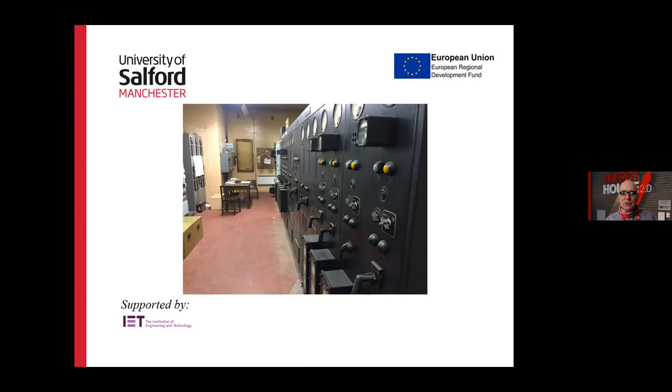This is just a little diversion, a little tangent here. I had to go around all of these substations, so I got to see more inside them than most people would. I started noticing that because they're humidity controlled, things last for a long time, and these large substations all had a table and two chairs. What I came across was this amazing collection of chairs going back from the 1950s all the way through to the 1970s. Because of the temperature and humidity controlled environment, they were in really good condition. I even had a little Twitter page called Chairs in Substations—I mean, these are pretty worth a fortune on eBay. But anyway, I digress.

So, the electricity network. Once upon a time, our electricity network was based on coal, and we had very few, very large coal-powered power stations. They would be running almost 24/7, often full on, running at full steam, and that would then go down the electricity network to the electricity meter in your house.

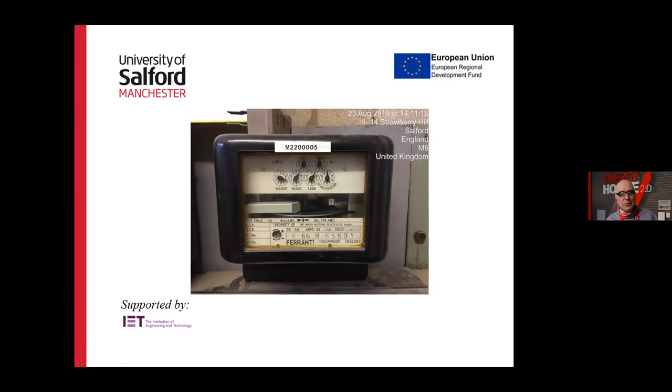This is a classic one—I used to go around all the substations, and this was one of my favorite ones here: a very old dial electricity meter. If you look on there, you can see 'property of the Northwestern Electricity Board,' made by Ferranti in Hollinwood—I think the Manchester Evening News is now printed in there. So this is a locally produced product, and the serial number F66M—the 66 is, I believe, the year of manufacture. That was the last time England won the World Cup.

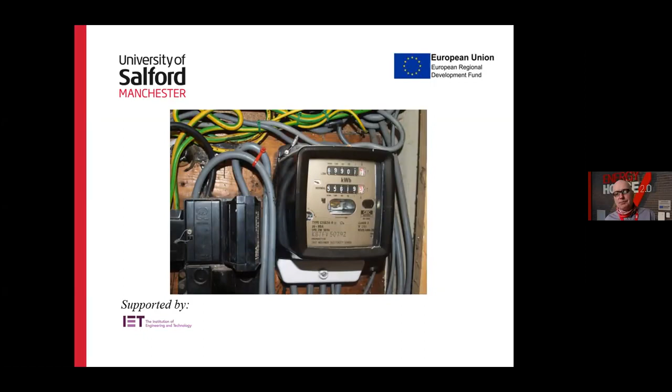So that was the standard meter, but because of the large coal-fired power stations running all the time, you did get high demand during the day and lower demand but still high generation during the evening and night time. So you'd have meters like this, with two readings: the top one for the nighttime tariff, economy 7 or whatever you'd like to call it, and the bottom one for peak demand. But whether it's the meter you've seen there or the previous one, it all came down to, at the end of the day, someone had to come round and read your meter. But the world has changed.

But then things changed again. Gas moved on to renewables. So what you're seeing is that these single large power stations gave way to generation becoming more decentralized and diverse, from wind, solar, and biomass to some extent - and in the home as well. This is what I'm really trying to concentrate on: what happened in the home is that we got the smart meter.

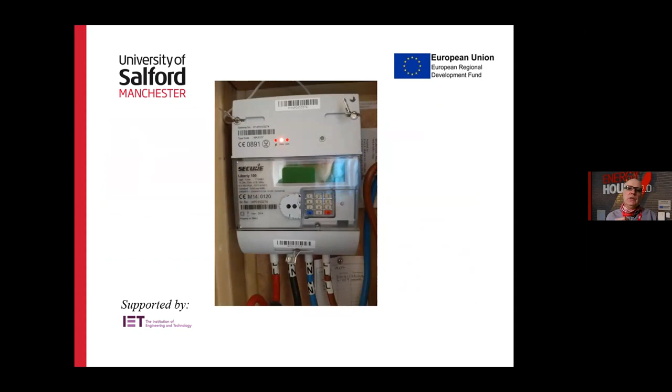So if we look in more depth through the keyhole at the anatomy of the smart meter, see what's going on here. This is the smart meter. Like I said, the old display was you had to come out and read it - it was a visual display. You still have that on the new smart meter, so you've got the display there. You have to press, I think it's A9, to bring up the consumption data on there.

Also down at the bottom, you see that's the proper meter - it's been replaced there, so that's just giving you the details of when the meter was replaced. But you've also got something there - those double dots, that's an optical port, so you can put something in there and draw data out of that locally as well. That's a big advance from the previous meters.

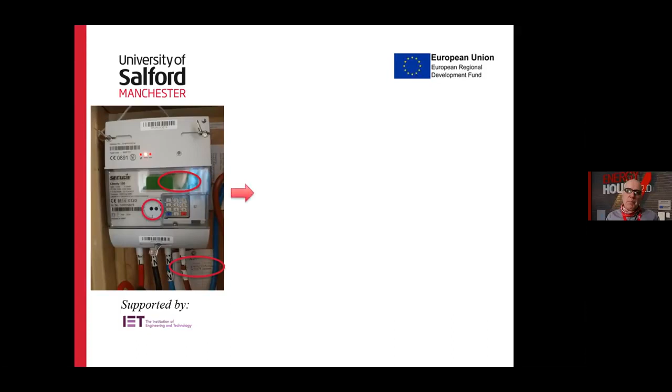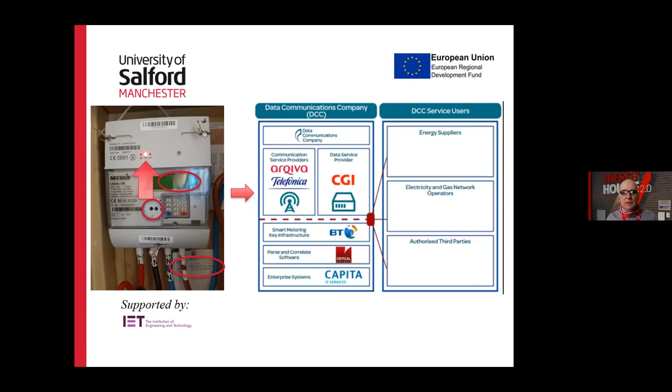But what's even more interesting is that you don't have to have someone come out and read this - it will read itself. You get a transmission of data here through the secure data network run by the Data Communications Company, and that data will then go out to the energy suppliers, electricity and gas operators, and authorized third parties. That arrow pointing up, with the light on, shows information going outwards to the wide area network, or the WAN.

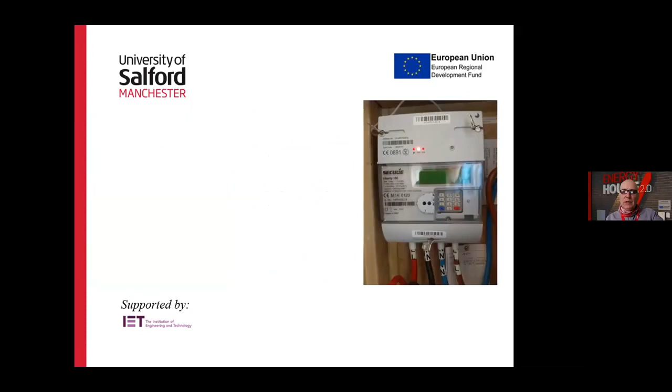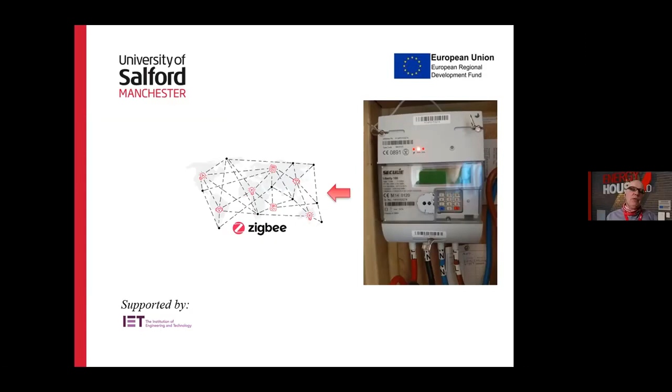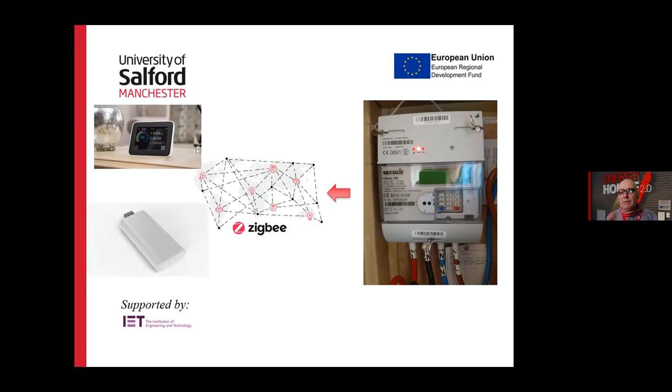However, it does something else as well - it transmits in the other direction too. There's also a Zigbee network attached to the smart meter, transmitting through the house, most commonly connected to your in-home display, but could also be connected to that other device - a consumer access device. So things are going both ways. There's a little button there where that arrow points, and you can see it says HAN on there - you probably won't be able to see that, but that's what it says. This meter is a SMETS 1 meter, and everyone's now moved on to SMETS 2 meters.

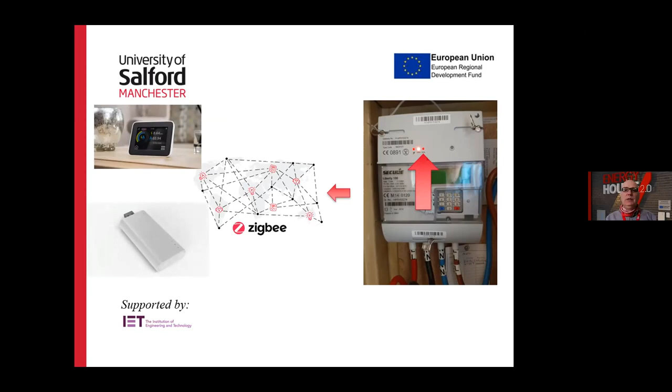So yes, the network inside your home is called the Home Area Network, or the HAN.

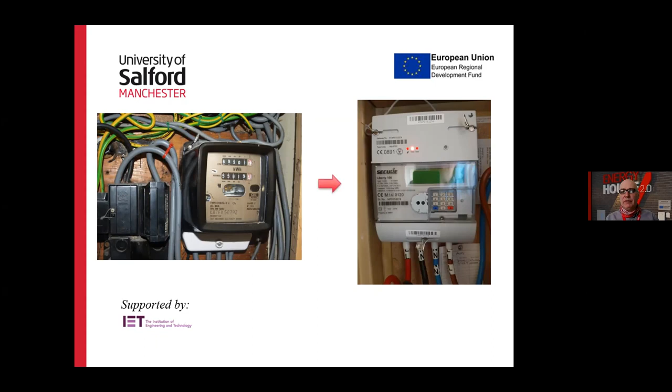The thing is that with renewables, compared to other sorts of generation, wind blows variably, and if you've got solar, the sun's out sometimes and not other times, which means there's more variability. So how do you handle this in the home? Well, on the left you see that old meter, which really only handled the nighttime and daytime tariffs. Now the smart meter can handle a variety of tariffs - it's a bit smarter, a bit more flexible, and it can handle these things you'll learn about, the time of use tariffs.

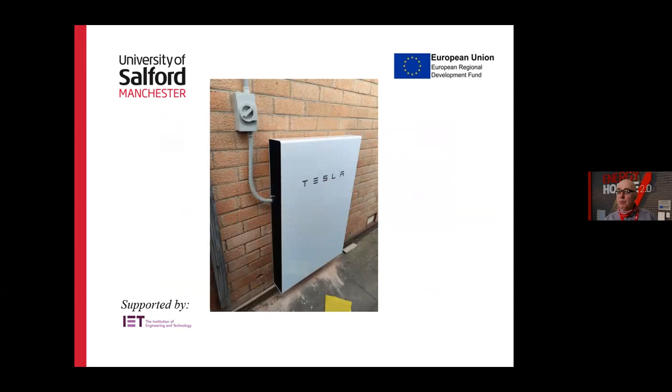Additionally, look at the home now - your home may have PV panels on it, your home may have a battery, and your home will soon or probably have a charging point attached to it, which will be the largest demand at any single time that you probably have from your domestic supply. You can also begin to do bi-directional charging, so you could use that car like a battery to either run your home or run back into the grid again.

So what we've seen now is that this is the way the network's gone: decentralized generation, variable generation, better data transfer, smart meters. We have a home area network, infinitely variable tariffs, and two-way energy flows. So very briefly, the old model: coal, electricity, through that meter into your home.

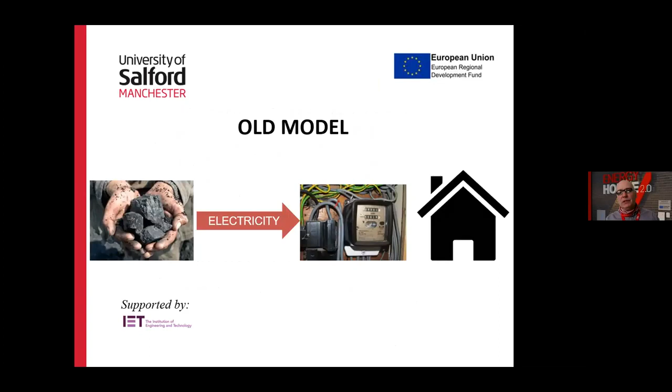The new model that we're seeing is a lot more complex. You've got renewables generating electricity, but the home itself could also have solar on the roof, putting electricity into the home and maybe back out again. Batteries going in and out, cars could be going in and out. And the interface for that is the smart meter.

So what you're seeing is that electricity will be going both ways, not just in one direction. And also data is going both ways as well. So this is a big step with regard to what we had, not only 10, 15 years ago.

So that's a simple introduction to how the energy network has changed from generator to consumer. It introduces the smart meter to the home and its potential, and there is a lot of potential for the smart meter, and it sets the scene for the following presenters. So I hope that was a nice, simple introduction for you.

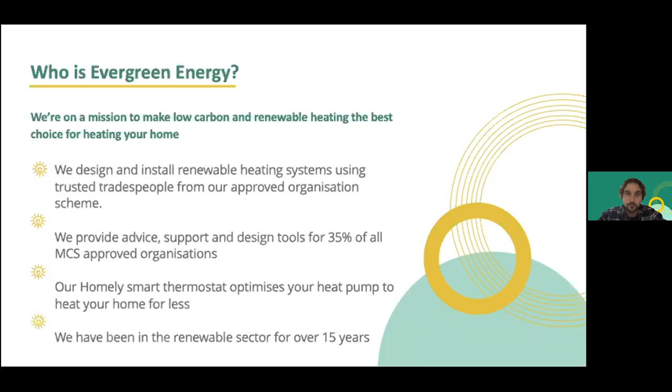I'll just do a quick intro in terms of why we're here and why we're talking about heat pumps. Manchester, for example, is aiming for net zero by 2038. To achieve this ambition, we'll need to see a significant change in the way we heat our homes, moving predominantly from gas boilers to a combination of electric heating, including heat pumps, district networks, and potentially hydrogen. In this workshop, I'm going to talk about the problems associated with electrification of heating and how a combination of smart tech and tariffs can help us overcome these.

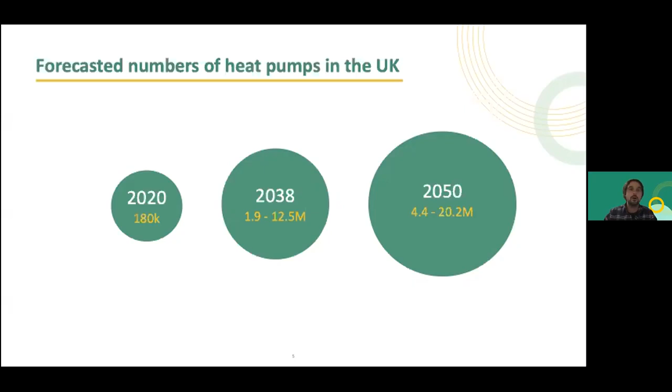A few numbers to get us going. At the moment - this might be slightly out of date - there were around 180,000 heat pumps installed in the UK in 2020, with that number growing rapidly in the next years towards 2050, 2038. The numbers in these slides have been taken from the future energy scenarios - National Grid provide potential scenarios of how we're going to achieve our energy ambitions.

In line with the heat pump changes, there's also a change in the way we generate our power, and we're looking to see a huge increase in the amount of power generated from renewable sources such as solar and wind, doubling in almost all National Grid scenarios by 2038.

Even though heat pumps are a great way of reducing carbon emissions - nearly 2 tons of CO2 can actually be saved per heat pump per household per year - there are some limitations in what our current electricity system infrastructure can handle.

If we were to assume heat pump change would happen tomorrow, and say that 12.5 million heat pumps were plugged into homes at similar times of day - just because the majority of people have similar profiles where they go to work and come back home, or at least we used to - that would cause concerns in terms of how the network is managed, and basically the power we'd need to push through the networks would make it really difficult.

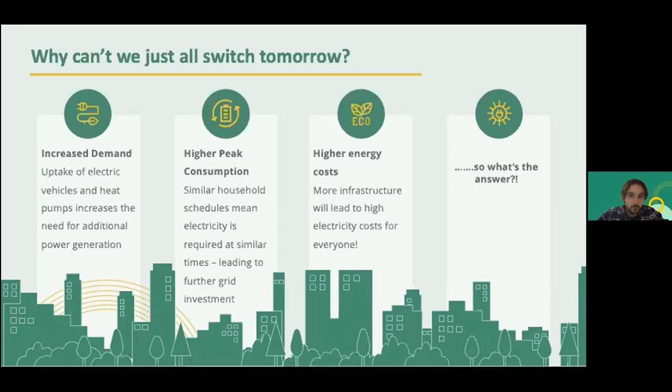We'd also need to consider that heat pumps are not the only load we're trying to electrify - we're seeing an increase in electric vehicle uptake too. As you add on all these different loads going onto the electric networks, we can see that without smart management of them, we'd see sky-high peak demands, requiring us to build more power plants, lay more cables, and pay potentially more for our electricity in the future.

Alternative to building additional infrastructure is, we believe, smart control of these devices. As an example, by using smart heat pump scheduling and smart vehicle charging, we can smooth some of these demands. So even though we all want our houses to be warm in the morning when we get up around 7 till 8 o'clock, and when we get back home, 6 till 10 o'clock in the evening, there is a way how these loads can be managed throughout the day and shifted around.

So you can start using houses, for example, as batteries. You can overheat it slightly during off-peak periods where electricity prices are slightly lower, and coast through the more expensive periods, smoothing out that demand curve throughout the day. This in turn reduces customer bills and the need for network reinforcement, as well as increasing the use of renewable energy, as some of those loads can be shifted to periods of high power production from renewable sources.

Quick explanation of how the electricity, how the actual domestic bill is created. I thought this was quite interesting: the wholesale price of electricity, the cost that an energy provider or power plant would sell that power to the electricity supplier for, is only a fraction of the actual electricity bill that we're paying. At the moment, the wholesale cost contributes to around 32% of the whole electricity bill. The other major components include network costs, operational costs, and some other levies the electricity supplier needs to add on to the bill.

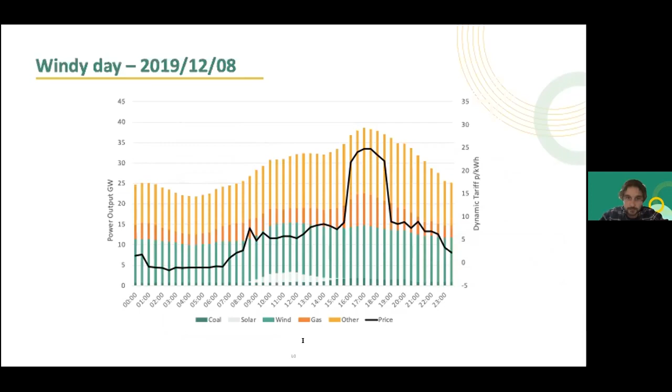There are, of course, other days when the prices are not as favorable and you don't get paid to use electricity. In the previous example, Agile customers, and Homely customers, had their heat pumps automatically turning on during the night just because they saw that opportunity to take advantage of those low cost periods. But on other days that's not as favorable, although there are still these pockets of electricity that are cheaper than the average throughout the day.

In this particular day, we can see that the wind production was much lower than the previous example. What Homely would do is try to pick out these cheaper pockets of electricity and dump as much heat as it can during those periods to coast through the more expensive parts of the day.

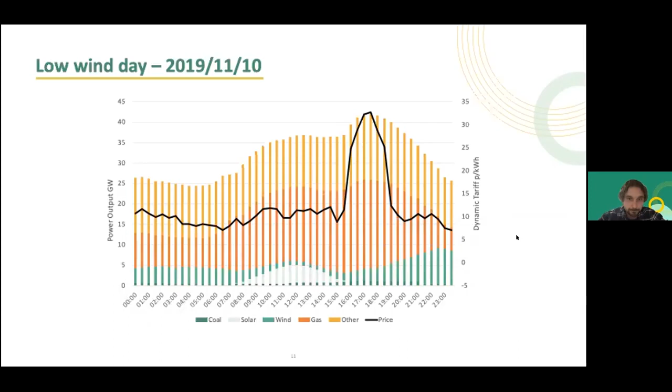That's a quick introduction into how it all comes together with the dynamic tariffs. Is there any questions at this point that I could clarify before I move on to the next part?

There's a question coming from Julian, which says, would it be sensible to shift the environmental and social obligation costs to gas as a fossil fuel?

From my personal opinion, I would like to see electricity prices being lower, because that is one of the routes we can take to decarbonize, through electrification of everything. I'm not sure whether I'd say those levies should be shifted onto gas. I would like to see the difference between the electricity price and gas change in that regard.

At the moment, the fixed cost of electricity, last time we compared, was around 12 pence per kilowatt hour, and around 3.5 pence for gas, which makes it quite difficult for heat pumps to compete, even though they're achieving 3.5-4 units of heat for every unit of electricity consumed. It's still a difficult position to be in. Sorry, I don't think I've fully answered the question, but I would like to see more of a change in the way gas is charged versus electricity.

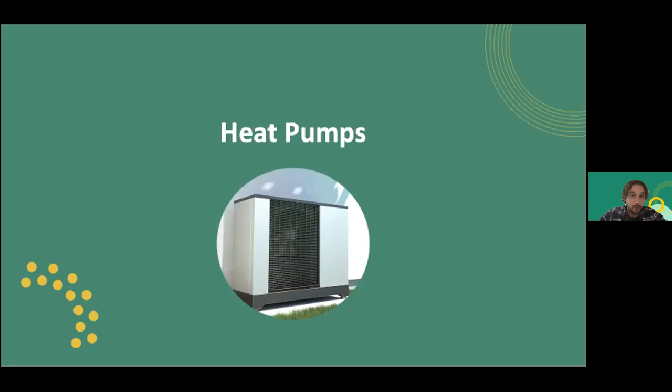So this bit is about what heat pumps are. In a nutshell, heat pumps are a very efficient way of heating the home through heat extracted from the outside air with an air source heat pump, or ground with a ground source heat pump, and delivered to your radiators and hot water cylinder with the help of electricity.

As some of this energy is actually extracted from external sources, heat pumps are able to deliver around 4 units of heat throughout the year for every unit of electricity that they consume, which means that 3 units of that heat is kind of free.

In addition to reducing the overall energy used for heating, they can also reduce customer bills further when combined with the variable tariffs we've been talking about today, such as Agile Octopus.

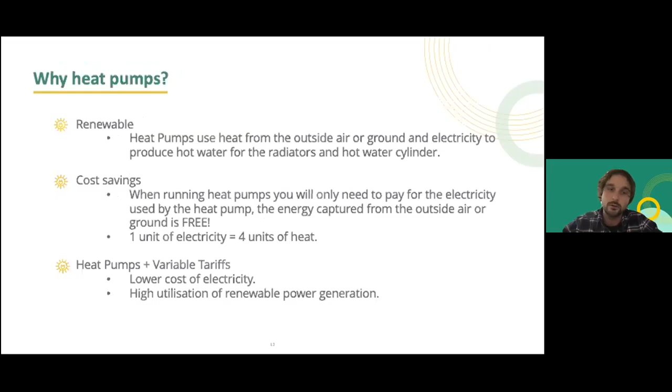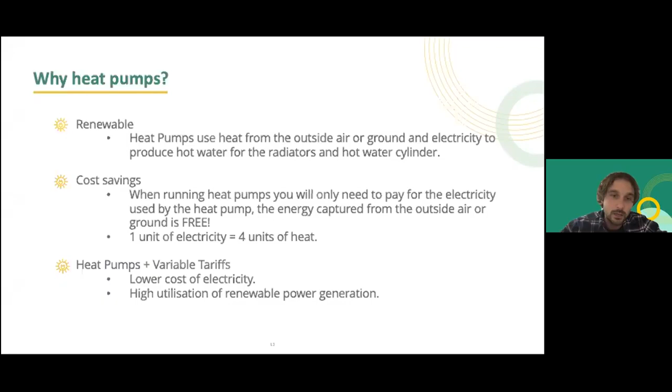The Homely thermostat is kind of the brains in the background to make sure that the customer doesn't need to run around and turn his heat pump on and off every time he sees a price dip. In the background, this is where Homely would take control, and it would try to slightly overheat your house during the cheaper times, and coast through the more expensive periods.

Just in terms of how the heat pump works, and I'm not going to go into detail again here, but on the slide at the moment you can see the reverse refrigeration cycle. It has 4 main components: the evaporator, compressor, condenser, and the expansion valve.

The way the heat pump works is that the evaporator extracts heat from the collector and transfers it into liquid contained within the evaporator called refrigerant. This would be your outdoor unit, for example, for an air source heat pump where there's a fan running. The refrigerant starts to boil once it's heated up by the energy from the collector.

The gas generated then moves through the compressor, which increases the pressure of the gas, resulting in an increase in temperature. The high temperature gas then travels to the condenser, which transfers the heat to the heating system. So on this side, you would have your hot water tank and radiators.

The final step in the process is the expansion valve, which removes the pressure of the liquid, allowing the gas to convert back into liquid, and then it goes into the same cycle again.

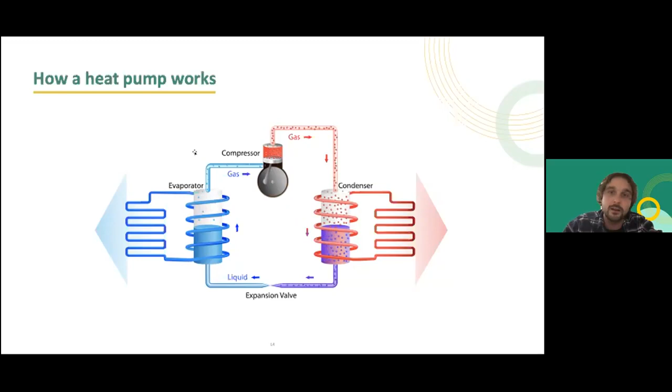The reason heat pumps are so different from gas boilers is due to their efficiency changing with the outdoor temperatures they're operating in, and also with the flow temperatures they're emitting into the radiator side. So on the screen, you can see COP, which is coefficient of performance.

Coefficient of performance means the ratio between the heat produced by the heat pump and the electricity consumption. So a COP of, for example, 3 would mean that 3 units of heat are produced for every unit of electricity that you're using up.

On the graph here, you can see a screenshot of the NIBE F2040 8 kilowatt heat pump, showing the coefficient of performance at different flow temperatures. These lines, blue at 35 degrees, red at 45, and green at 55, are the different flow temperatures of the system.

Flow temperature, I think the easiest way to think about it, is the water temperature going into your radiators. So the higher the temperature going into your radiators, the lower the efficiency would be for the heat pump. There's also a change in the efficiency of the heat pump when there's a change in the outdoor temperature.

As the outdoor temperature reduces, for example moving from 10 degrees to 0 degrees, your coefficient of performance at a flow temperature of 55 degrees would drop from 3 to 2. So you would only get 2 units of heat for every unit of electricity consumed instead of 3.

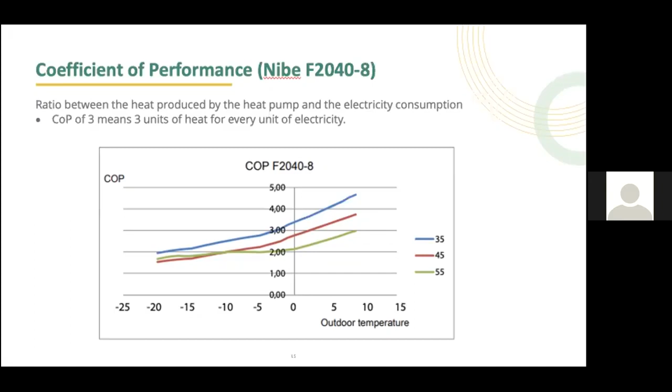So now we're moving into the bit about Homely controls and what it is that we do at Homely. I'll touch upon a couple of other things like battery integrations and PV, it's just something that we've been working on. I think it's quite interesting to see all of those different vectors interacting with each other.

Just as a brief, Homely has been designed as a smart thermostat specifically for heat pumps. It was always with the heat pump in mind, to account for those coefficient of performance drops. So when we're modeling the heat pump operation and optimizing for the house, the inputs going into the algorithms are basically your set points - what is the minimum temperature you would like to achieve in this dwelling.

We then look at the weather forecasts for the next 24 hours, and the electricity prices for the next 24 hours, and try to figure out the best scenario for the heat pump to operate, knowing that if we raise the flow temperatures higher, we're going to lose efficiency of the heat pump. And also, if we run it at very cold temperatures in the middle of the night, that would also reduce the efficiency of the heat pump.

In addition to that, there's also the learning element of the house. Every house is individually learned in terms of how long it takes for it to heat up and cool down, based on the temperatures outside. We look at the temperatures outside, we look at the temperatures internally, and we fit parameters to identify the building profile for that particular property.

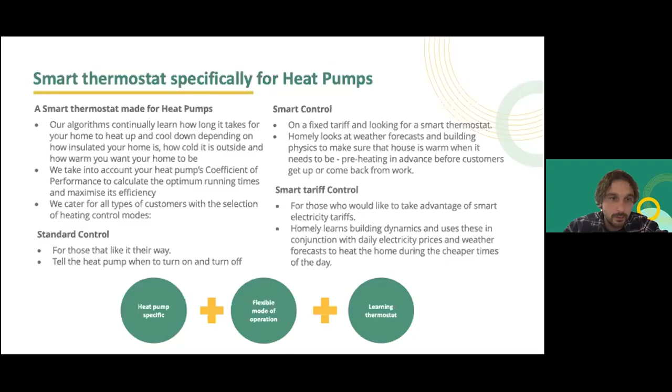Just to provide a little bit of an intro in terms of other smartness that you can get in the house, we've run some simulations where we included the PV and the battery and the Homely, and just did a comparison of the costs. Before I move into that, just a couple of assumptions.

So we did these for a house based in Bristol. We assumed that the heat pump is providing both heating and hot water. The fixed tariff electricity that we assumed in this particular place was 17.745 pence per kilowatt hour. The fixed export rate was 5.5p. And we were modeling a well-insulated house, 2016 build, with a 6 kilowatt heat pump and around 91 square meters area.

As mentioned, we did include the ability to take into account PV and battery. So PV installation, we assumed 2.9 kilowatts and the battery capacity of 4.8 kilowatt hours.

Moving on to the customer benefits for this kind of control, there is the optimization savings when in smart tariff control mode. So we estimate the heat pump running cost for year 2020 using 2020 Agile Octopus prices. If you were to run your heat pump on a fixed tariff, you would have paid around £500. Just by switching to an Agile tariff, you would have paid around £252. And then adding Homely on top of that, you would have saved an additional £77.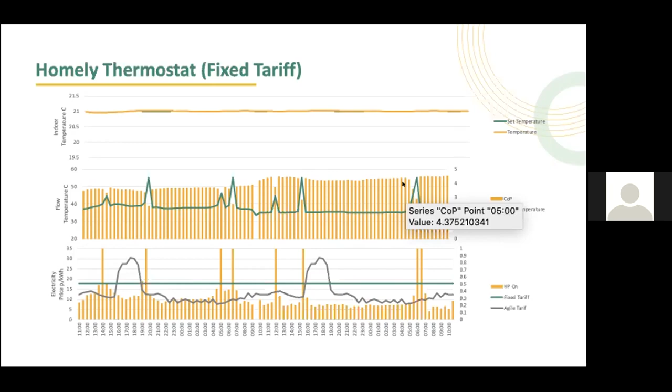If I can set out a scenario, if we take together a set of components, be it a Tesla battery, a phase change thermal storage, a hot water system cylinder of a given size, it might be larger or smaller depending on how much it's useful to have that, the possibility of a smart control system, and the heat pump. What would you say for a resilient system? In other words, one which we could invest in with some confidence that we're not going to regret the decision 10 years down the line. What do you think the components of that system might be?

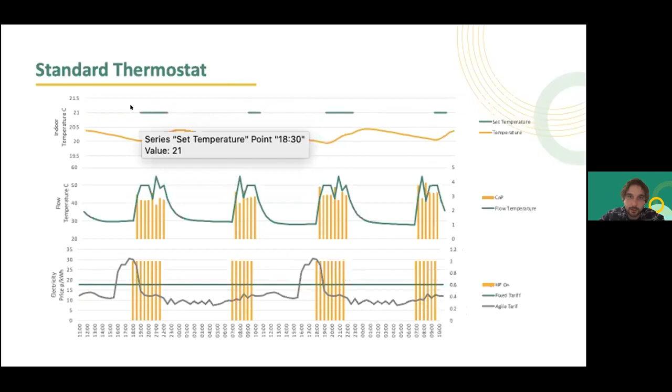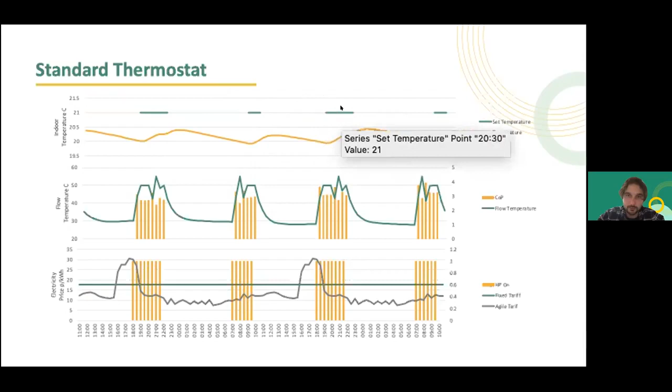If you look at the standard thermostat, with the set point from morning to evening, because of the way we've changed how we work, the standard mode would have managed to achieve those temperatures and maintain that 21 degrees throughout the day. Other smart thermostats would have also heated a bit more throughout the day to maintain at least 21 degrees.

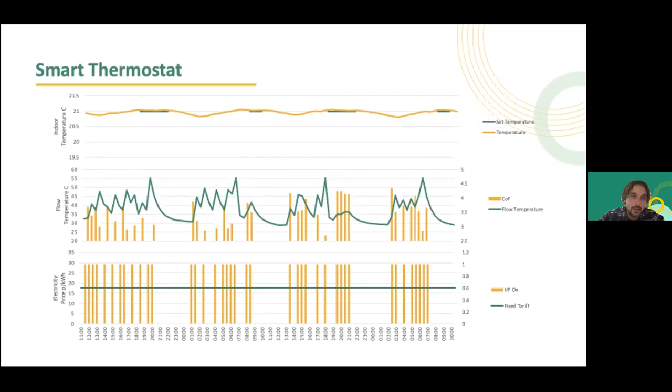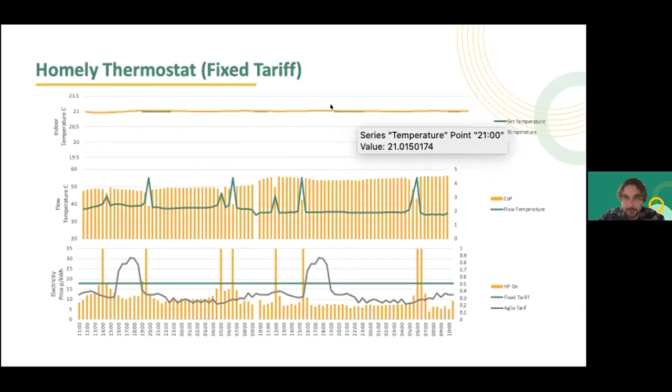But as you can see, when you go into smart mode with a fixed tariff, the temperature is actually maintained above 21 degrees throughout the day, just because the algorithm sees that as the most optimal solution to ensure minimal flow temperatures to compensate for the heat we're losing from the house. If you had that set point of 21 degrees between 8 and 10, I don't think this result would change significantly, although this isn't that particular case.

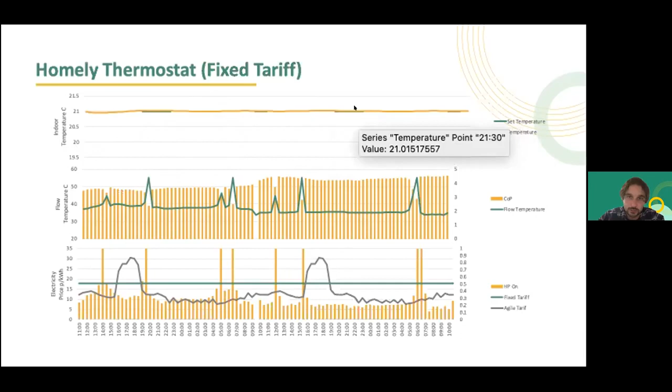In terms of the variable tariff as well, we can see how the house is never below the 21 degree set point. So even if you had the minimum set point of 21 degrees, the actual heating profile would not have changed significantly, unless you didn't like the house being slightly warmer than your minimum temperature.

One of the other components we ask customers is: what is your flexibility? Assuming you want the house at least 21 degrees throughout the day, what's the maximum you'll allow if it saves you money? Are you comfortable with 21.5, for example? During the period just before 4 p.m., would you be okay for the house to reach 21.5 degrees, or comfortable with 22 if it saved even more money? That's another consideration when looking at occupancy throughout the day.

But in terms of just the minimum temperature for the smart control and smart tariff control, I don't think those profiles would change.

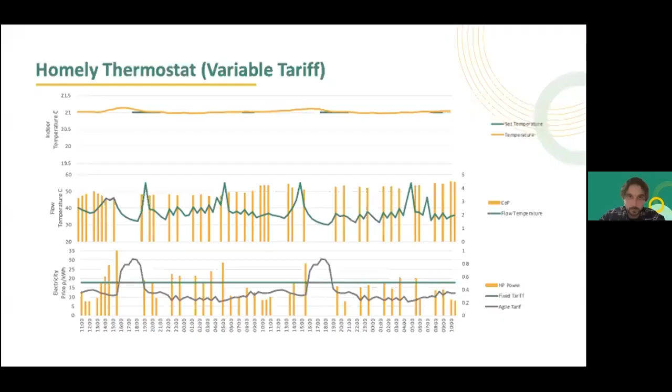So this was at the very beginning of Homely, and Smart Meters Lab has been very helpful in the way we've progressed with Homely, just because when we started off, it was really difficult to convince people—this was around 3 years ago now—and it was really difficult to go into presentations where you didn't have data supporting the claims you were making in terms of savings. This is where Smart Meters Lab has been instrumental in helping us.

So what we were trying to do in the Smart Meters Lab was show that there's a potential for savings, and we present here the 20% savings while using Homely controls and variable electricity tariffs. The test has been done in the Smart Meters Lab using the NIBE heat pump and a single room control, which is slightly different to the controlled conditions you could achieve in the energy house, but it was a good starting point.

We used a very original scenario, which was 21 degrees as a set point. So if you were to run a heat pump on a weather compensation curve, the default setting on the NIBE unit we were using, how would that compare to smart control using Homely and Octopus Agile, where you had the same morning set point of 21 degrees and evening set point of 21 degrees.

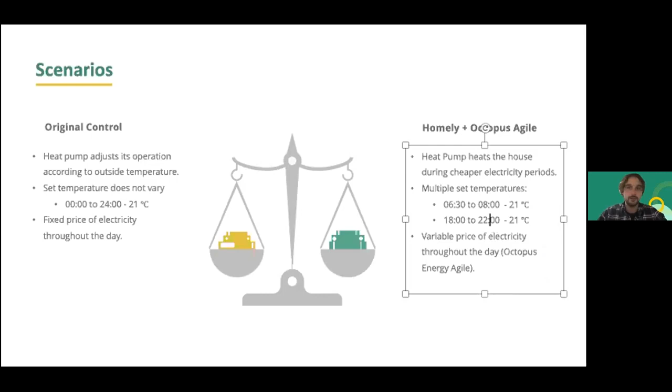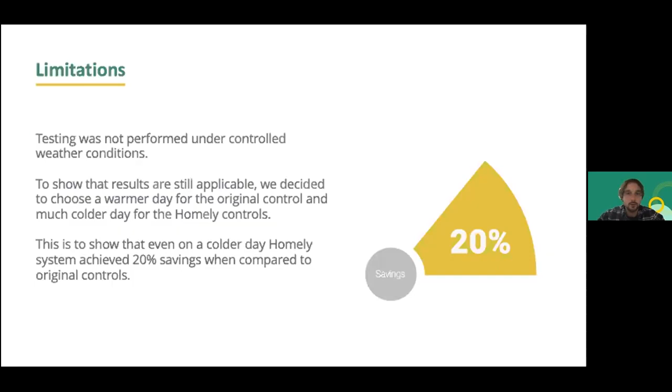In terms of limitations, the testing wasn't done under controlled conditions, but to show the results were still applicable, we actually penalized the Homely control day. When choosing the outside temperatures for the Homely control day, we used a much colder day to make sure that, if it was like for like, you should have paid more for electricity used heating with Homely on this particular day compared to the original approach.

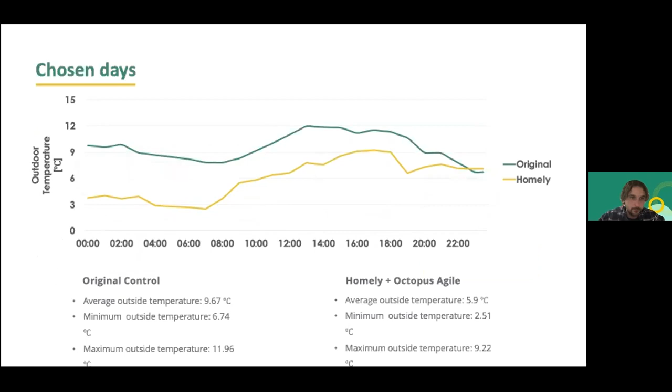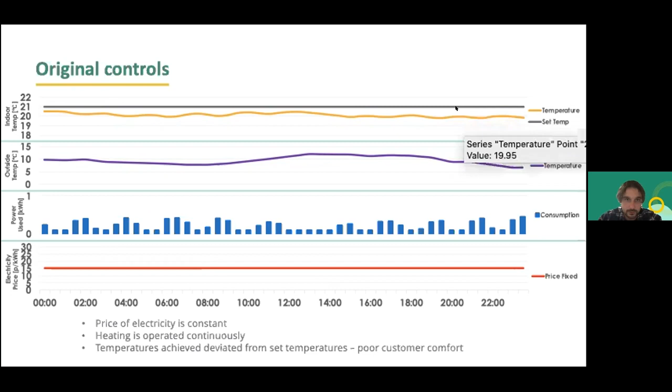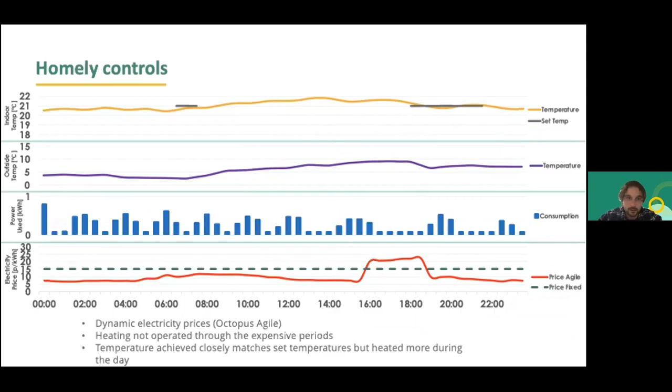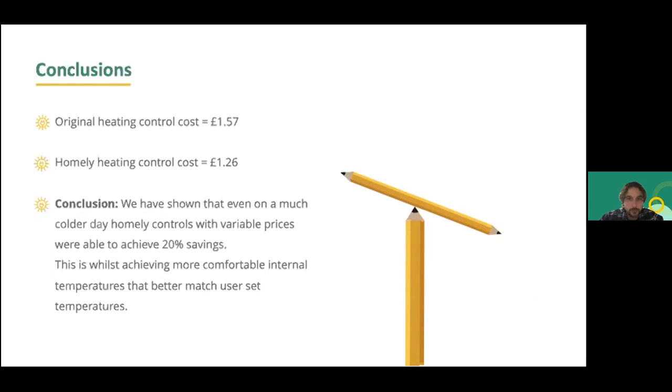As a conclusion, what we've seen from that initial trial is that with the original heating control, the cost of electricity would have been £1.57. With Homely heating control on a colder day, it was £1.26, which was a strong backing for what we were going to say when explaining to people what we're actually doing. This really helped because we'd done a physical example of how it could work, and it does work, which I have to thank Giannis and the team, Smart Meters Lab, for.

Thank you very much, Karolis. It has been a pleasure working with you all these years on such an innovative product.

Can I very quickly, before we go to the break - I have a question from Michael. The dilemma of using fabric storage is that the lowest cost electricity is at night when we are tucked up under our duvets. We don't want our bedrooms heated to 23 Celsius just to ensure the kitchen is warm at 8 a.m. A well-insulated dwelling should be able to coast through the night without the bedroom becoming uncomfortably cool. This is where thermal storage capable of a quick preheat before the heat pump takes over might be a good option. That was a comment from Mike.

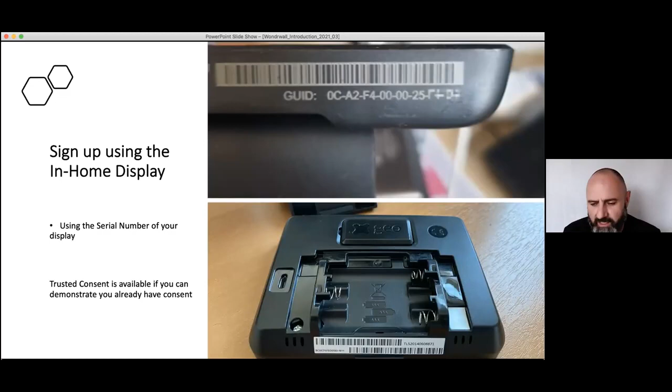What you'll need is your MPAN - hopefully you all know what an MPAN is. It's your meter point number that's on your bill, a 13-digit code, and your in-home display. So here's my in-home display. Flip it over on the bottom and you'll see - you probably can't see because my camera doesn't focus - but you'll see a long digit, as you can see on the screen. Type those in without the dashes in between, agree to the terms and conditions, and that's it. We'll collect your data and give it to you to download.

The consumer portal, as I mentioned, is designed as a B2B business, so as other businesses come on board, they will request access to your data over and above the service. You might choose to sign up with us directly. You'll be able to see who has access to your data, withdraw consent from that data, and download your own data. So it's fully GDPR compliant, giving you complete control of who sees your data, when, and what they see.

Every time we share data with a new business, we request explicit consent to be shared, so we'll never share your data with businesses off the back of the T's and C's you agreed with us. Each time a new business comes on board and wants access to your data, we request your explicit consent to share that data, and you can withdraw them individually and independently through the customer portal.

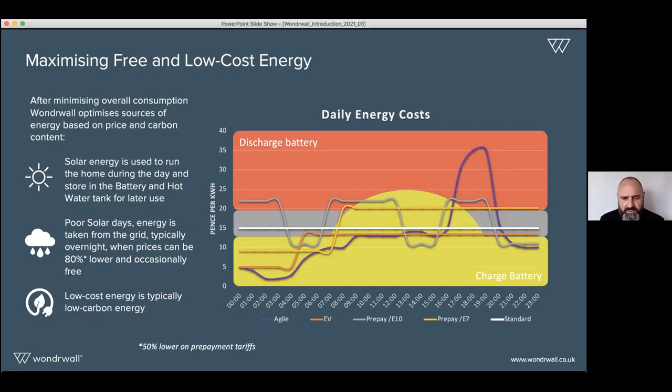So that's working for a bit, but in principle at the moment, we recommend our customers take the Octopus Agile tariff, and we track that because that's the most complicated one, and that's the system that achieves the greatest optimization.

So what's actually in our Wondrwall system? I mentioned the light switch, 13 different sensors. It's actually got Alexa built into the light switch as well. And before I started this presentation, I pressed the mute button on my Alexa, so it's not going to start talking to me like it normally does.

But it's got Alexa built in, so you can do anything with a Wondrwall light switch that you can do with a traditional Amazon Echo.

With one difference, we implemented a push-to-talk feature, so it doesn't listen to you permanently. You press the button, you press the W, and then it starts listening to you, you can talk to it, because we had quite a lot of feedback with concerns around that. So the default configuration is it doesn't listen, you press to talk.

But you can order pizzas, you can order Ubers, you can do everything. Play Sudoku, you can do everything you can on a traditional Amazon Alexa, plus control your home as well.

The second element of the Wondrwall solution, and I've sort of touched upon this in the presentation so far, it's around intelligent gas-free heating. So we have the hot water tank, an intelligent hot water tank.

It can heat a variable amount of water, and also when you draw off that hot water, the tank doesn't mix. It's got a specialist diffuser in the bottom, and the tank doesn't mix to create a tank full of lukewarm water that you have to reheat. But the boundary between hot and cold remains relatively solid within an inch or two within the tank.

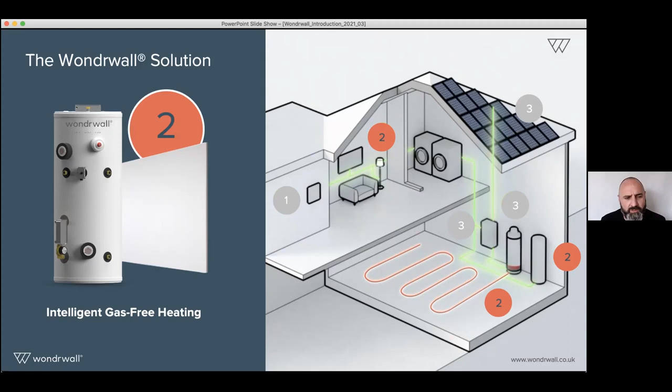The final part of the Wondrwall solution is solar and battery storage. So if you've drastically reduced your energy consumption, and we typically reduce the energy consumption for a property by about 50%, using intelligent hot water systems, using intelligent space heating solutions, then that remaining 50% can come largely from solar generation.

Putting 4 to 5 kilowatts on a roof will typically support an entire property throughout that year, so net zero, achieving net zero in effect.

Obviously, solar generation is created during the day and the sunny days, and mostly during the summer. So we use the battery to store that. The other interesting side effect that we found as a result of the Wondrwall solution is through a combination of using flat rate export tariffs.

Carolus mentioned the 5.5 pence per kilowatt hour to export excess energy, combined with the agile tariff, where we typically buy energy from the grid at 4 to 5 pence a kilowatt hour. That ultimately achieves a seasonal storage capability from an economic perspective, at least for that property. During summer, with enormous solar generation, you get paid 5.5 pence a kilowatt hour for excess solar after the hot water tank and battery are full, pushed out to the grid. Then in winter, we consume typically wind generated energy at 3am, 4am, charging the battery and heating the hot water tank, again paying 4 to 5 pence a kilowatt hour, achieving seasonal storage economically in a Wondrwall home.

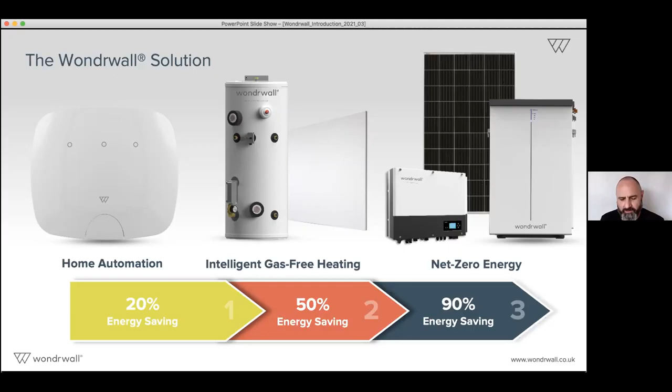Our first customer deployment was in April of last year, so they've been running for about 13 months now, actually in East Manchester, in Gorton. They were paying around £20 a month on their energy bill, and when we looked at it in April, they were £230 in credit. It's not a particularly large house, it's relatively small, but that achievement was made with the first deployment of a Wondrwall solution. Quite incredible in terms of what it can achieve.

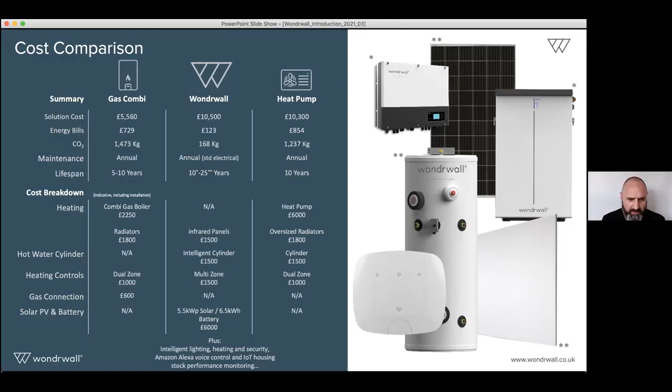I'm not going to go through this in detail, but from a cost price perspective we've compared it to gas combi boilers and to a heat pump. Bear in mind the Wondrwall solution includes, I think that price is about 4.5 kilowatts of solar, actually 5.5 kilowatts of solar, a 6.5 kilowatt hour battery, the smart hot water tank, and a bunch of panels, about 8 panels, in that 10.5K installation price. Whereas a heat pump installation includes a heat pump and the required radiators. The other benefit from Wondrwall is there's no wet system in the house other than the kitchen and bathroom now, so the potential for leaks is drastically reduced. It's all electric, plumbing becomes a lot simpler, and there are no oversized radiators.

We're working with many of the leading housing providers, both from a new build and retrofit perspective. I hope you'll see more from Wondrwall over the next couple of months as we're making real strides in these areas. We've won a number of awards as a result of the different perspective we've taken on net zero and efficiency, the digital-first approach to drive a far more efficient model. That includes how the home is actually being used, not just how the shell or fabric of the home performs on its own.

We've also created specific services for the social housing sector because of the vast amount of data we collect, so we provide a landlord dashboard. Through this dashboard, our customers are starting to better understand the condition of their home, and better understand safeguarding for vulnerable members of society. If a particular property is constantly underheated, the occupant might think themselves in fuel poverty, even though the Wondrwall system does a lot more. But it's about understanding and being able to educate that tenant, and to move that forward.

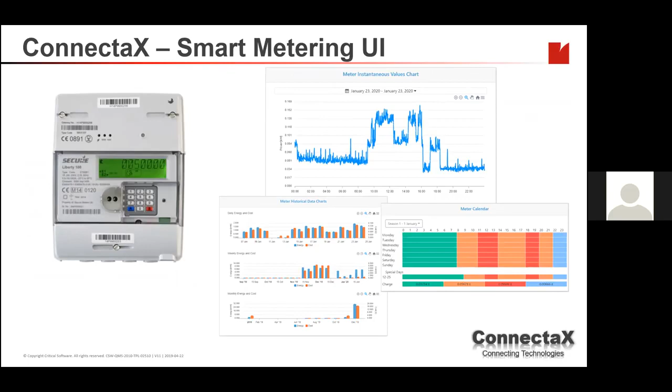The first section is focused on the smart metering data, where we can view meter information, real-time data, charts with instantaneous readings and historical data. We can also view the meter's current tariff calendar.

The second section is focused on the smart home devices, where we can scan, add and manage the devices, view instantaneous readings, control different actuators, and schedule multiple automatic tasks.

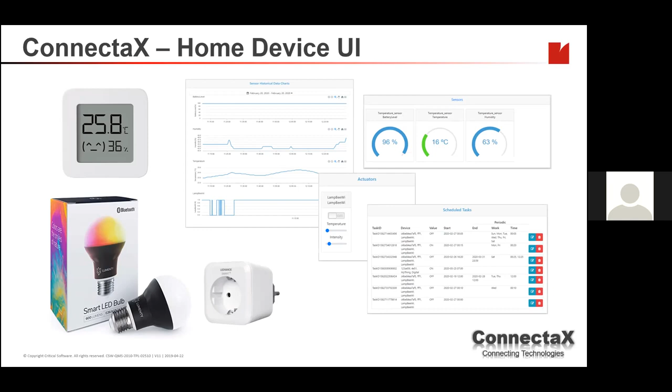The third and last section is for viewing and controlling home appliances. As previously mentioned, ConnectaX has fully integrated Home Connect, and all available features are accessible through ConnectaX API. Besides using the common API, we can also schedule multiple automatic tasks for these appliances, as we did for the smart devices—a feature unique to ConnectaX.

By collecting all this data in the AWS database, we can then apply different AI and machine learning models using AWS SageMaker and Forecast, so that we can predict future energy usage, identify appliances by their digital signature, detect anomalies, and ultimately feed back information to ConnectaX to help its autonomous decision making. Currently, we already have energy usage prediction integrated into ConnectaX, but we believe that appliance identification through its digital signature unlocks a number of possible applications with valuable interest to the user.

As part of the ConnectaX R&D project, and in partnership with the University of Coimbra, we have also published a scientific article which studies, analyzes and presents the ideal machine learning model applied to a real set of energy data from the London area. This article is currently being reviewed by IEEE.

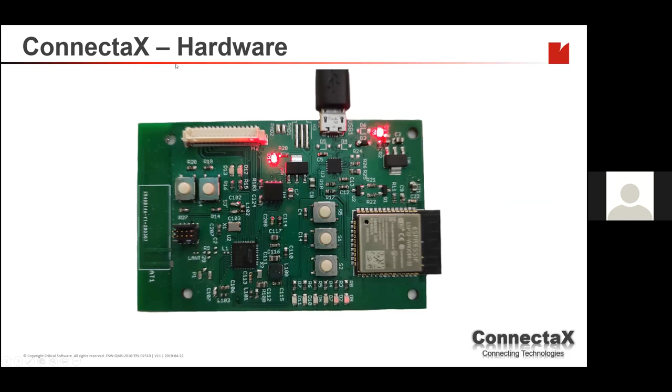Before we go on to a quick demo, are there any questions? Jose, at the moment we do not have any. We don't have any questions. So could you please move to the next part? Okay, thank you very much.

Okay, just changing the view here. I think you can see—we have a panel here.

With the smart meter, a smart light and a temperature sensor, and we have a coffee machine from Siemens in this case, that uses Home Connect. So I'm just going to share the web page. I'm going to present a part of this, and then I'm going to pass it to a colleague of mine, who is also in the session, to do the mobile application demo. Just one moment, please.

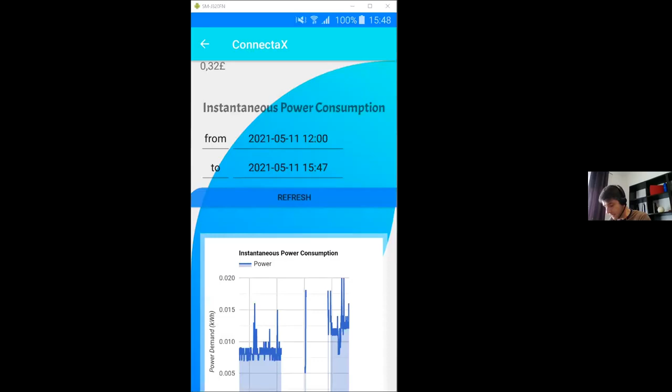So we have a forecast based on previous consumption, and the objective is, of course, to get below this consumption. We have also the chart with the consumption, where we can select the period, let's say from 12 o'clock until now, and we have the consumption or the demanded power that we have made for the period.

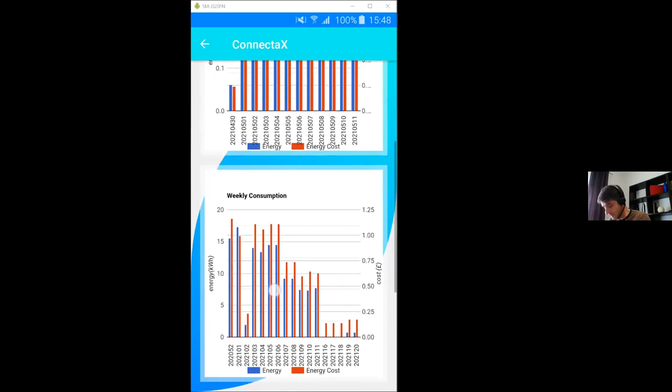We have also the historic charts, as in the web app, for the daily consumption, weekly consumption, monthly consumption. Our sensors - so again, the same sensors.

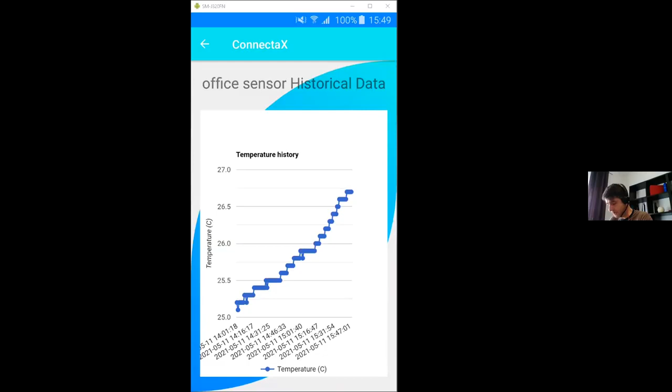In this case, we have the temperature sensor and the humidity sensor. The battery is the battery of the sensor, and we can see the history of each sensor, in this case the temperature.

Also our actuators. So we can turn off the lamp. I don't know if we can see it. Yes, turn off, turn on.

And also we have access to the schedule the same way that we have in the web app. And we have also the 3 scheduled tasks that we had on the other side. Okay.

The Bluetooth devices that we can connect - so we have the office sensor connected, also the office lamp, that are our 2 devices, and we can scan other devices to connect them if they are to connect, of course.

And finally, we have the connection to the Home Connect appliances. In our case, we have the coffee machine. So what we are doing is - Diogo, I need a coffee, please. Can you send me one? Okay, we have access to the coffee machine through the Home Connect interface.